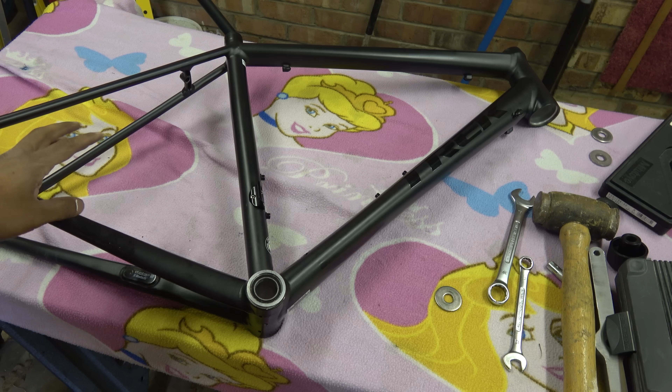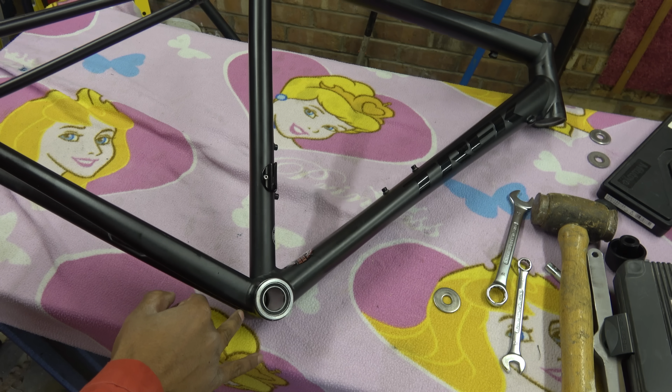This is the Trek Emonda frame. It is aluminium and it's been welded, so it's basically tubes that are extruded and then welded. This bottom bracket, which we'll come to in a second, is BB86. The frame is extremely lightweight for an aluminium bike. The quality of the welds, I'm not too sure about because they've been painted over. And I haven't bothered scanning this because it's aluminium, so what can you do about it? Not a lot.

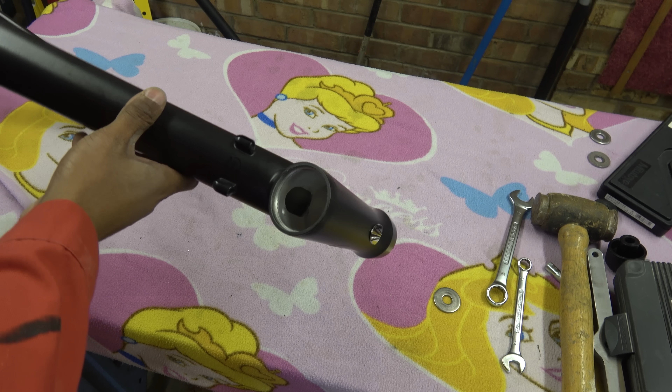Overall frame, it visually looks very good, but there are some issues with aluminium, and the biggest problem with aluminium is when you join it. So this tube, this tube, this tube and this tube have all been welded. As you apply weld to the frame, it distorts. Now, one of the big problems with aluminium is the distortion and then machining afterwards.

Now it looks to me like this head tube has been machined afterwards. The reason for that is this wall thickness where the weld is way too thin to have pre-machined and then welded it afterwards. Now a lot of unscrupulous, basically wankers in the bicycle industry, even the carbon ones, take standard tube, machine it first, weld it, and then give you it. In the case of an aluminium or a steel bike, those bottom brackets are always on the piss, the headsets are on the piss, and all these other things. Now they do have jigs which they say will alleviate this distortion, but it's complete fucking bullshit. It won't stand up in any court of law.

In the case of carbon fibre, you do get these bespoke carbon fibre manufacturers, they again use tubes and then they almost wrap the corners like a bandage with this stuff called prepreg, sorry, and then get it baked, and you get the same kind of thing happening. You get the distortion. Now one of these twats who does this is Filament Bicycles. He's called Richard Craddock, so don't buy a bike from him.

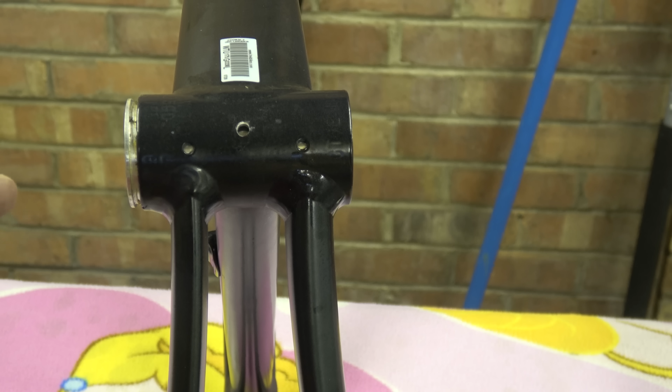Anyway, this bottom bracket is well and truly stuck, so the first thing we need to do is get this out. It may have friction welded itself in, but before we go any further, let me just show you the alignment, because when I picked this frame up, I took one look at it and thought, this is completely ridiculous. So I'm just going to visually show you the misalignment. This is the drive side, and I've made a little concentric device.

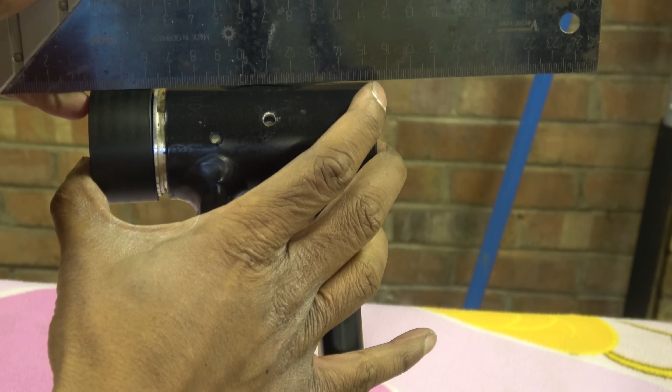Now, if I put that into the drive side, I'm hoping you can see that on the top there, it's flush. Pretty much. But on the bottom, it sticks out by a couple of mil. Let's just see if we can show you that. Might just get a ruler. Alright, so we've gone for a set square, but that'll do. Okay, it is clear there. If we turn this around, up here, it's clear. It's way past it, absolutely way past it, and I can show you the same thing on the other side.

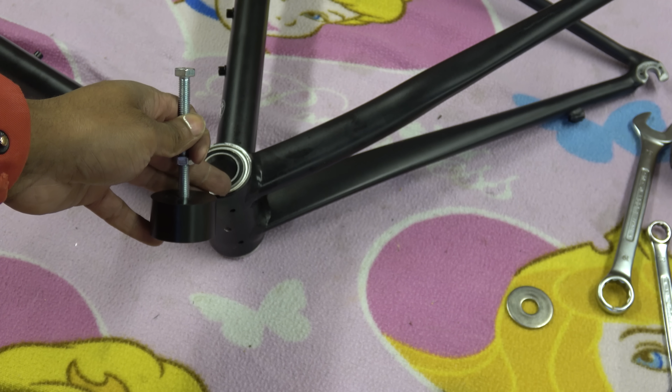This is much more obvious because there's a gap there, but there's no gap there. If I put the straight edge on it, you can clearly see what the problem is, so it's misaligned. I don't know if this has been drilled from this side and then flipped over and drilled from the other, but when we remove this we'll probably be able to find out. So to make it easier to remove this, I'm going to extract the bearing using my homemade bearing extraction device.

I can get it in. Oh, there we go. I need to shift it. Ooh, that is tight. Blimey.

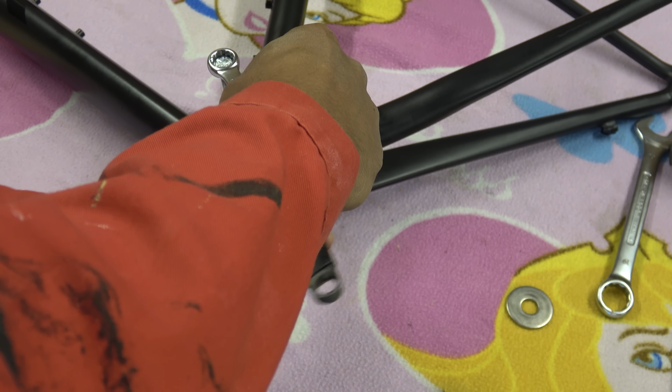Okay, so that's one bearing out. God, that was tight. Jeez. Oh yeah, look what it's done to the bearing puller. It's completely bent it. Oh well. Never mind. Right, flip it over and let's do the other side.

With that bearing, I don't know if you can hear it rumbling, but crikey, it feels horrible. So that's a FAG bearing. That actually spins quite well now I've removed it from the frame, but it will have brinelled from removing. Right, so let's get this one out. Don't know how many more times this puller is going to go. It's not really designed to pull something that's that tight out.

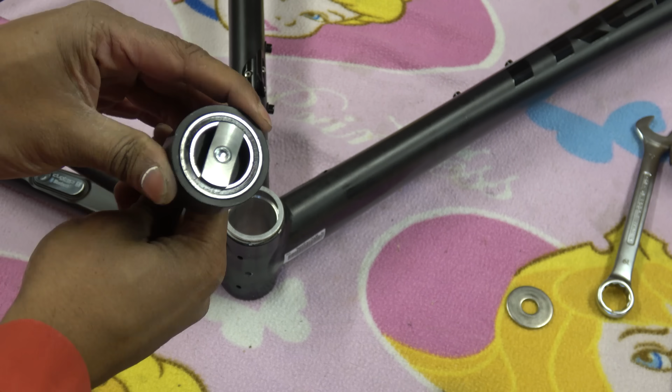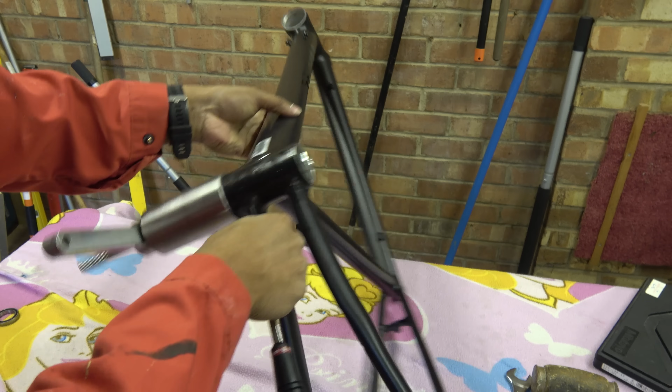Bearing number 2 removed. Now I need to take the sleeve out. So we're ready to pull this out. All I can say is whoever drilled this needs to be shot. I'm just going to get this socket set up. They were clearly a complete fucking imbecile. Oh, right, so I've got the press set up, so hopefully this will come out. Oh god, that's tight.

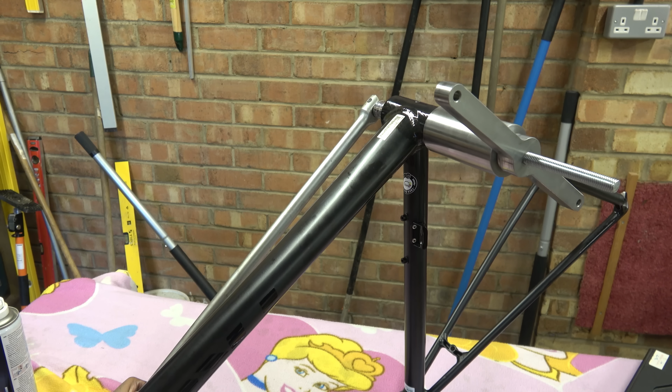Oh god. I think we need a spot of freeze spray now, because that ain't going nowhere. So this is now getting to ridiculously pissing levels. I've had to use my 2-foot 600mm breaker bar to get this to turn. It is so tight. Fucking hell.

I don't know. I think this is gonna have trashed the bottom bracket shell. We'll see. Ooh. Oh my words. God. Jesus Christ. Fuck. I'm going to stop here, get this out, and then show you what we've got afterwards, because it's just taking forever.

So you're rejoining me after about half an hour of fucking around. Managed to get the bottom bracket out. You can quite clearly see something going on the non-drive side, but basically perfect on the drive side. Now, this is my bottom bracket, and I can pretty much certify that when it went out the door, it was to the correct dimension. But if we look at the frame, it tells a different story.

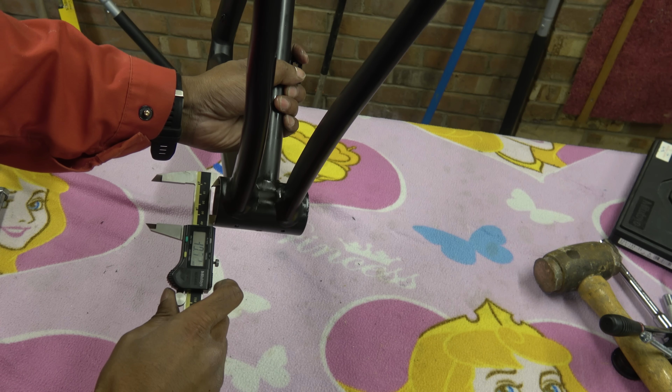Now, there are all those do-gooders that say I shouldn't use a vernier, but just for an initial measurement, if I show you the drive side, 40.99, so that is pretty much in spec. Now there's going to be a bit of inaccuracy with the vernier, but you know, that ties in with that, because the fits have been perfect. There's not a mark on it.

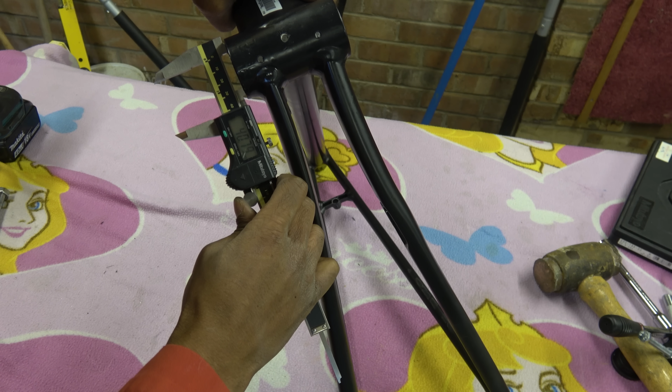Okay, if we turn it over to the other side, which is the non-drive side, 40.77, 40.78. Highest I got there was 40.9. Let's try a bit more. 40.61. Wiggle, wiggle. This is just complete fucking shit. Absolute shit. This needs to go back to Trek for them to have a look at, because this is a machined hole. So whoever's machined this side hasn't done their job properly.

Now if you look inside the bottom bracket, so this is the drive side, there's nothing really there. If you look on the non-drive side, it's completely fucked to pieces.

Right, well, we start the section of the show with PowerPoint. It's my favourite bit because then I go a bit off the wall. Now, I usually pick a topical title for all of this, and I was scraping the barrel because I couldn't really decide what adjective in terms of shiteness was worthy of this frame. And I feel as though I've underdone myself.

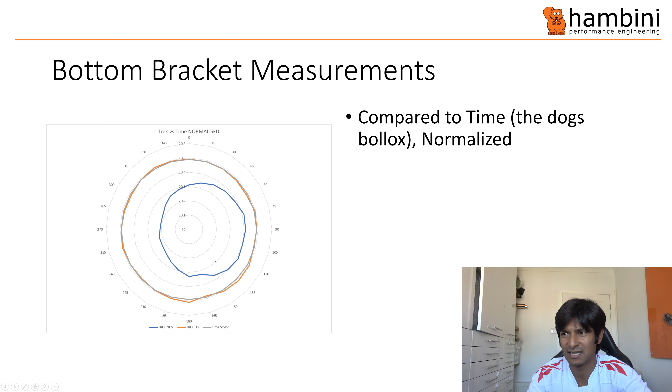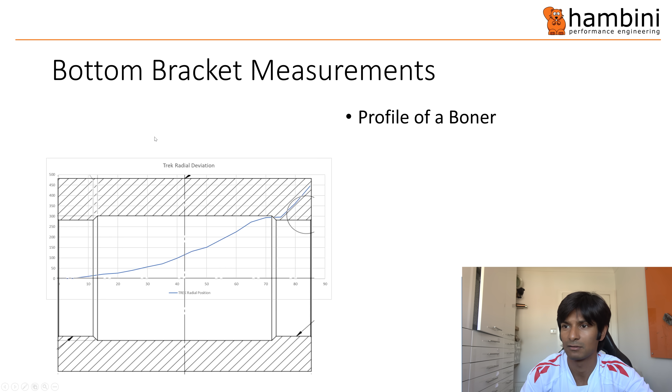Right, this next slide is appalling. So what we have is, I have put in here the grey line, which, oh, I need to turn the pen on, fuck. Right, the grey line, oh, fucking hell. Oh, bollocks, what have I done? Fuck. Why is my pen not working? Oh, right, here we go.

The grey line, which is in there, is the Time Scylon. So that is the current dog's bollocks of bottom brackets. This is all normalised to BB86. Now, if you look at the Trek drive side, which is this orange line, you can just about make it there, it's not actually that bad. So we can get away with it. What is appalling is the other side. Fuck.

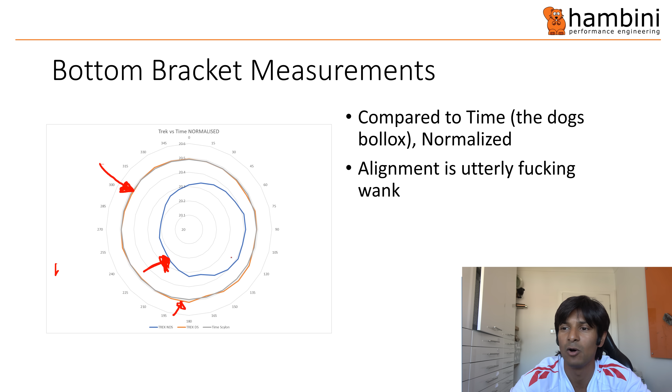So the blue line is the non-drive side, and I might have even labelled these the wrong way around, but it's kind of immaterial. The one is a lot smaller, and then the centre is there or thereabouts, and the centre of the other side is here. So you've got that much misalignment, which is utterly fucking wank. Fuck, more coronavirus. Right, I need a drink.

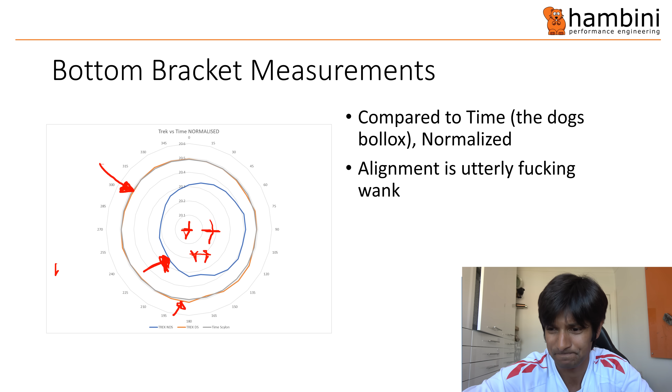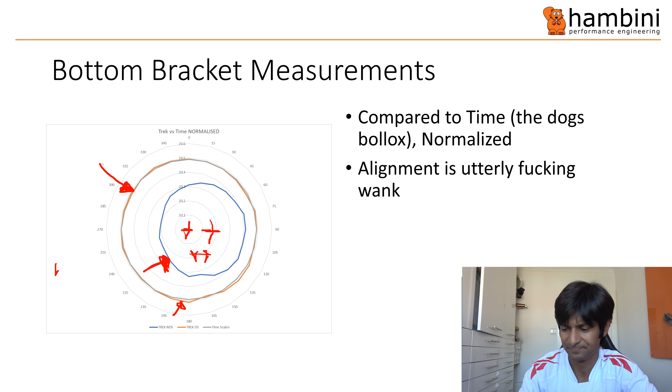So, a couple of people asked me what normalising means. Normally the Time Scylon is BB386, so the hole's 46mm. On BB86 it's 41. So all I've done is scale it, basically. Right. So the misalignment is utterly shit. This is the radial deviation.

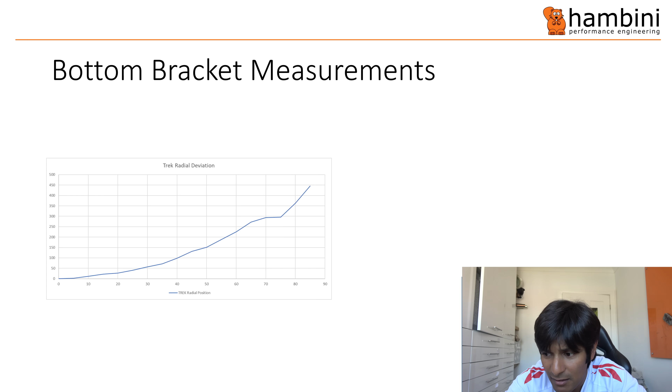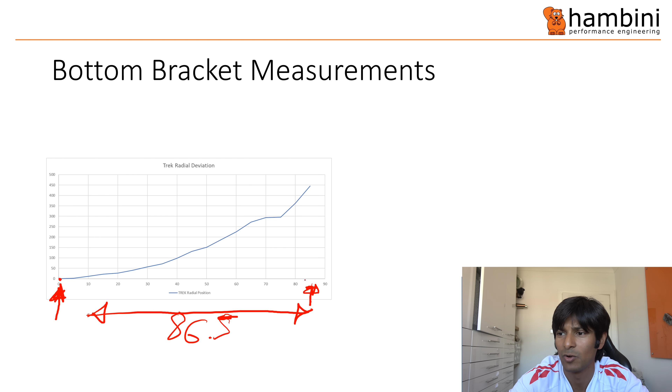So if you pick, where's the fucking pen gone? Right. If you pick here and start at the bottom bracket, and then you finish here, that is a distance of 86.5mm. What that's saying is, ideally you want the centre line to be at 0 all the way across. If you measure the relative centre line between the start and the end, you are out by, on average, 450 microns, which is 0.45mm.

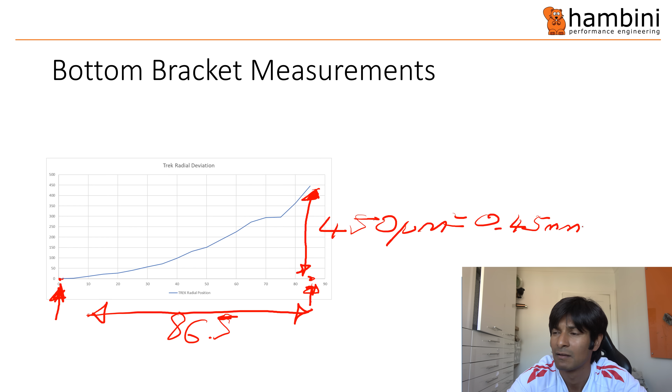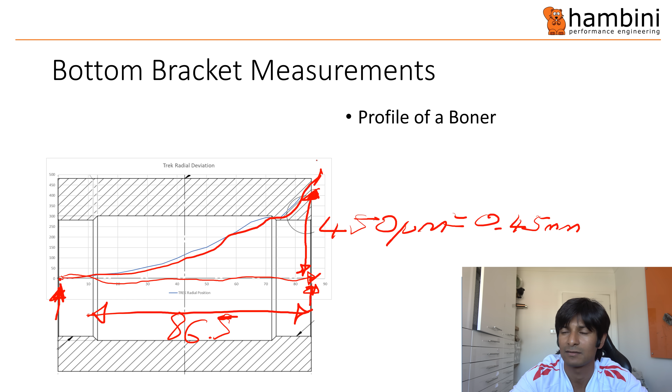What I've done is I've overlaid, well, before that, it's got the profile of a boner. I couldn't find a suitable picture that I could show on my YouTube channel of a boner. I'll leave you with that one. But I've overlaid a BB86 frame shell on it, so you can see what the deviation is doing. You ideally want that line to be straight across there. What's actually happening is it's bent like a boner. So that's what's happened.

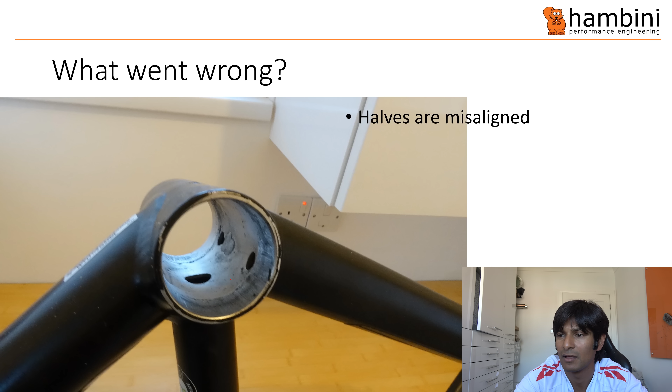So what went wrong? Well, the halves are misaligned. It is difficult to see in that picture, but where you've got all these striations and fucked-upness, that is what is known as galling. Aluminium galls. So if you try and put two surfaces together with too much friction, it effectively friction welds itself, picks up, and then you get this problem. And that's why it was such a fucker to get the thing apart.

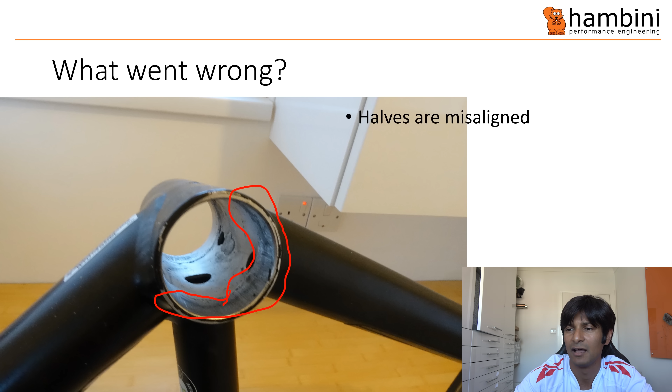So the halves are misaligned, and you can see this defect over here, which I've got in better detail in this shot. So over here, there's this defect. So what's happened is the guy or girl, can I erase that? Pointer options, ink colour, eraser.

Now, if you look at the other side, which is here, there's no defects on the hole. There's nothing there. On this one, what's happened is he's blown a hole through here. As soon as you blow the hole through, you need to refill the material, and that's what all this is here. And after he's refilled it, he's ground it, and that's why it's all flattened. You can see the grinding marks on there.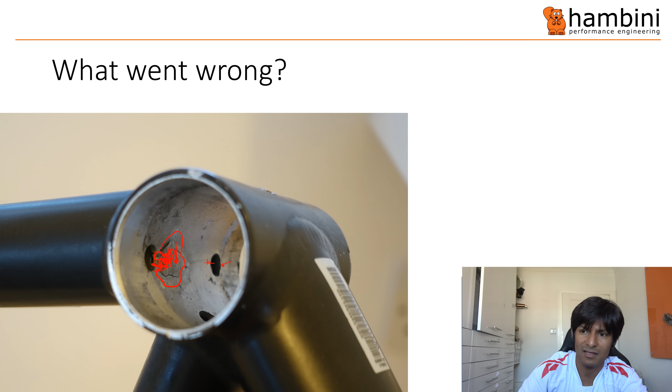So that's the problem. Now you might think, okay, so he's blown a hole and filled it with metal. What's the issue with that? Well, the problem is around welding. Welding causes what's known as a heat affected zone. So when you heat something and then weld it, you get this. You're effectively joining two bits of metal, one bit of metal here and the other bit of metal here.

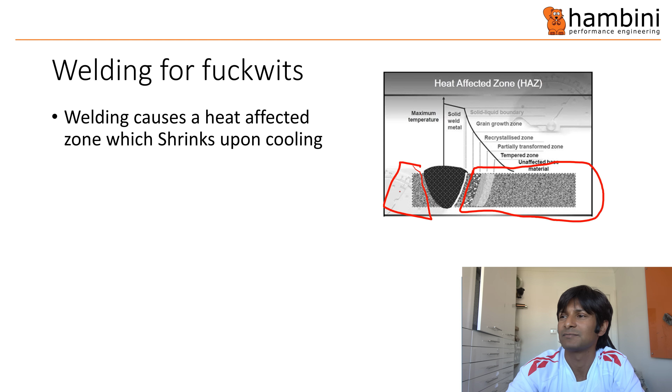Because of the heat involved, you end up with this piece here, which is the weld material, and then all the way going that way, you end up with a change in the material structure. So its properties change, so it becomes less strong, brittle, all this kind of stuff changes as you carry on. The biggest problem is, as it cools, it shrinks. That is going to be covered on the next slide, but that's what happens. It shrinks. As it shrinks, it distorts.

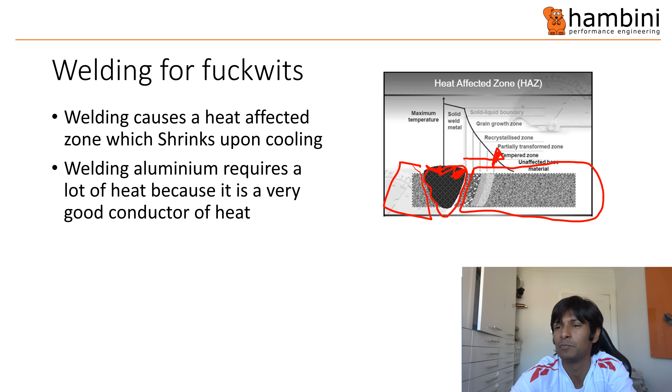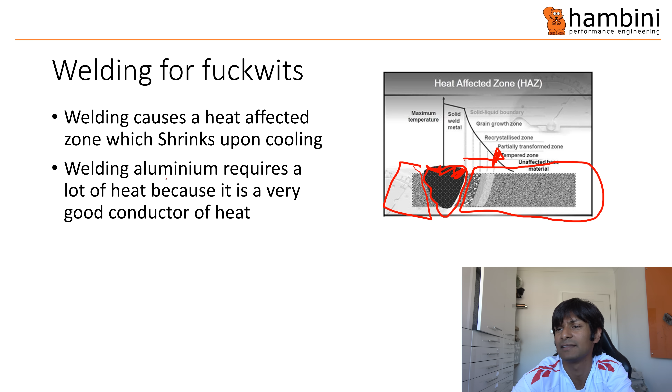Now, welding aluminium is a complete bastard. It is a bastard because it's a very good conductor of heat, and if you're welding thin aluminium, it's very easy to blow a hole in it. You could literally puncture a hole in it just by pulling the trigger once and away you've gone. So it is quite difficult. Most people TIG weld aluminium. You can MIG weld it, but TIG welding is the go-to standard really.

The other thing is, when you get to thin wall sections, you can distort the material after you have machined it. So you get the tube, machine it away, it passes quality control, and you'll find after 2 days the shape is not what you intended. And that's because thin walled aluminium relaxes.

So if you got a Hambini bottom bracket, the material is almost irrelevant. Even in steel, titanium, whatever, when it gets to thin wall, and it's the thin wall, not the material, that's the problem, I always let it relax. Let it relax for a day, 2 days, and then you'll find that the dimensions change, and then it probably needs a tickle. Once you've done the final tickle, then away it goes.

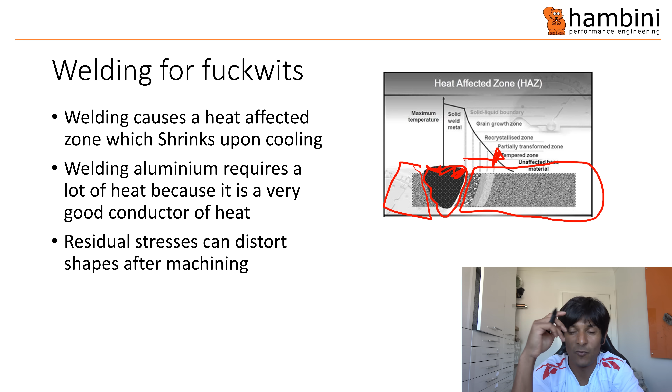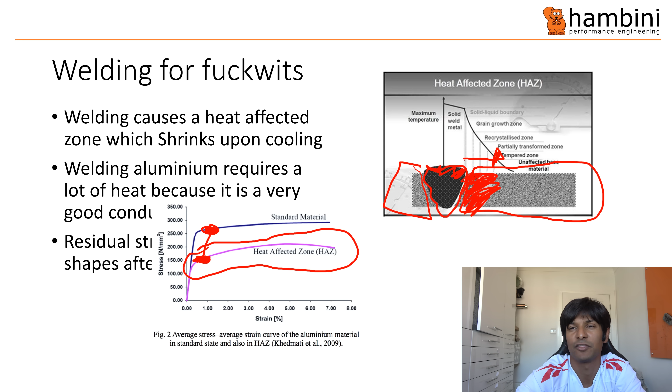The other problem is the strength. So welded joints, specifically around here, in the heat affected zone it's called, those joints are significantly weaker. So the ultimate strength is down from there to there. If it's stress in newtons per millimeter squared, that's the same as megapascals, you're 260 down to 160. So you've lost over a third of your strength, and the joint is brittle. So that's the issue there.

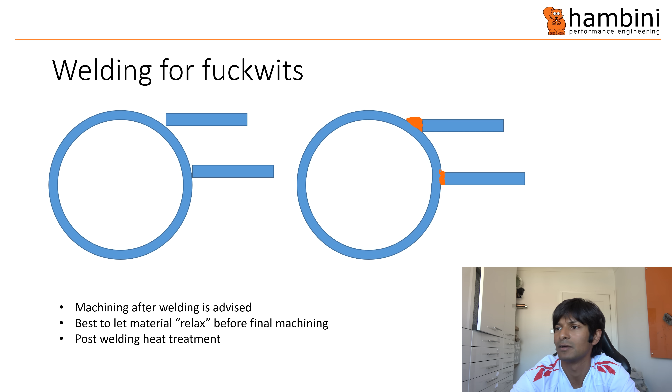Right, this is kind of an illustration of it. So this is your round tube, let's call it the bottom bracket, and let's say that is part of the chainstay and that is the other part of the chainstay, and you need to join these three parts together. What you'll end up with is this. You can see this orange bit is the weld material, but if you look carefully in this area, it has distorted the tube, so the tube is no longer round. This can happen to carbon as well.

One bottom bracket I got involved with was a chap from Switzerland. He bought a bike from a guy called Richard Craddock, who runs a company called Filament Bikes somewhere in the West Midlands. Richard Craddock was measuring the tubes before he put the bike together, bandaged the pre-preg carbon around it, baked it, and then was sending them out. Now I got one of these, and my bottom bracket went absolutely straight through the frame. And he wasn't really that interested. To be honest, I don't think he had a clue. So I think he's in line for a roasting shortly.

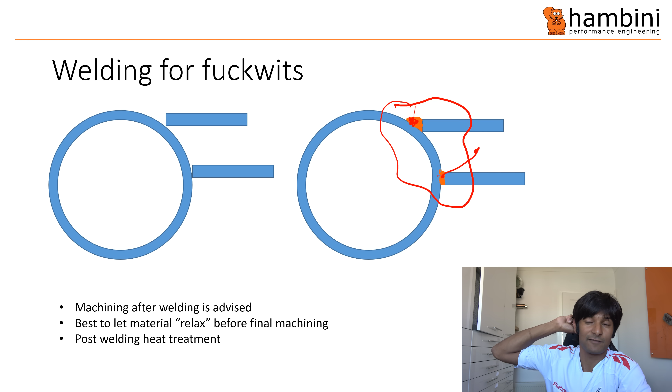The thing to do with this is, first of all, you need to machine it after you've welded it. You might think, well, that's pretty obvious. Well, you'd be surprised the number of bike builders that don't do that, because it's actually very difficult to hold the bike afterwards to machine it, because you can't do it in a lathe. You'd have to do it in a boring machine or a milling machine.

Again, you need to let the material relax before you do the final machining, because you get residual stress, and then you could use post-welding heat treatment. Now on aluminium, it's a bit of a grey area, because as you do the post-welding heat treatment, the material properties change, so you could make it weaker.

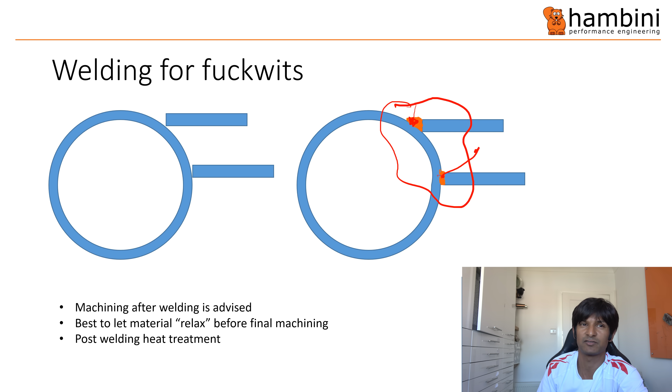So that's why T4, T6 and all that kind of stuff exists. So it's the heat treatment that's involved. Now the fixes for this are not straightforward. The first few fixes I could think of were, well, to slash my wrists, pour citric acid onto someone's face, fire some semi-automatic weapons at someone's head, Prozac, cocaine. What I'm really trying to say is this is not something that is easily fixable.

So I sent the frame back and said you should go back to Trek and take it up with them. I don't know what happened after that, but this is pretty appalling. It's just shit, really. Absolute shit. Completely indefensible. You just cannot defend this, because it's just dreadful. Right. Now we come on to the cuntish shitbag scale of engineering fuckwittism,

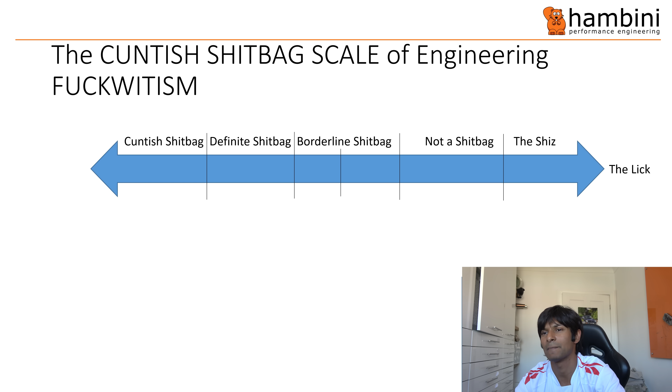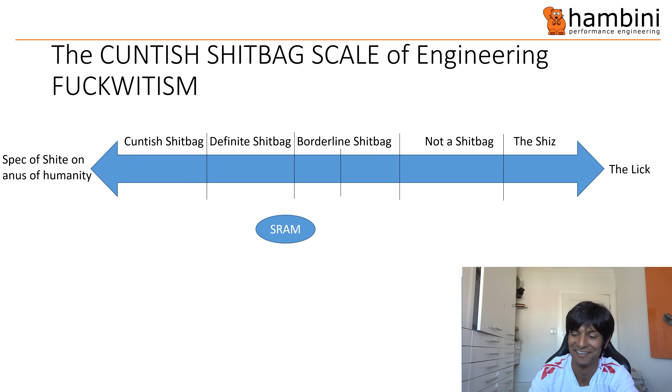with the usual suspects. Right, the lick, the Shiz, not a shitbag, borderline shitbag, definite shitbag, cuntish shitbag, and speck of shite on the anus of humanity. We have SRAM in definite shitbag, borderline shitbag area. Just tolerances. Tolerances. Bollock heads who believe wider tyres are faster. They're the same as last week. I haven't changed that one. Spokeless CFD.

A number of people. Sorry, my coronavirus is really bad. I blame those individuals who go riding in the middle of a lockdown filming themselves for spreading it. Right, and then reporting to the police.

So Spokeless CFD, a bunch of idiots. And the other thing I've read was some fuckstain said our disc wheel is 12 watts faster than Joe Bloggs' disc wheel. What a load of fucking shit. The drag difference comes from a solid boundary. The aerodynamics of a disc wheel is like trying to describe the aerodynamics of a penis. Now I believe, well, yeah, I can't say that bit. Right, anyone who is not French, so vive la France, allez les bleus.

Shimano, right, they are heading towards the left, because they still haven't sorted my rear mech out. Now, a guy from Merlin Cycles called Rick did contact me, and I replied to him saying, you know, where's me rear mech? And I haven't had a reply back, so I'm hoping he's chased it up with Shimano or Madison or whoever it is.

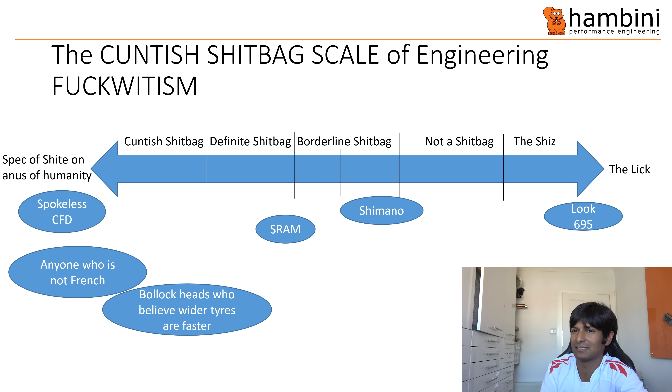Right, the Look 695. Oh, I fucking want one of them. Might have ordered one. Have I spelled that right? If you're in New Zealand, please tell me if I've spelled that right or not, because I'm not quite sure. I've probably spelled it wrong, but I am dyslexic, and I'm 5. So there we go. Right.

Fruitcake middle-class time trialists who think they are fast. I found that these middle-class fruitcake time trialists like to have discussions about me and my language and not the engineering. I mean, this is just pure entertainment, fuckstains. Right. Anyone who thinks H7 is a size.

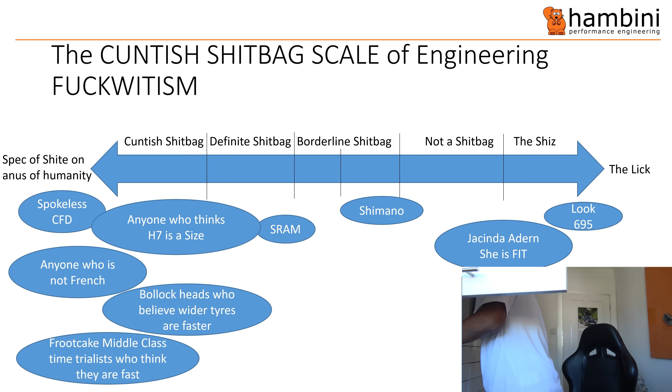Now, I have a book. Allow me to get my book. Where's my fucking Zeus book? Ah yes, I gave my Zeus book to Jimmy from nursery. I was trying to get into his mum's knickers and I failed. But yes, Jimmy from nursery has my Zeus book.

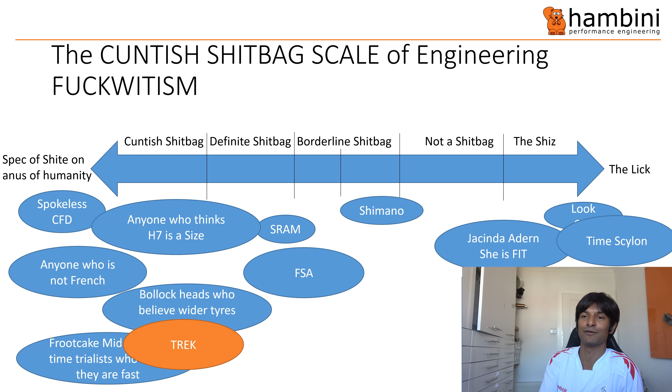FSA! Time Scylon. Oh, that is a good buy. And Trek. Now, Trek are in cuntish shitbag, definite shitbag territory. Now, there's all these people who'll say, oh, you've got a sample size of 1. Well, you should have a sample size of 0. Nothing like this should get through the door because it's utterly fucking wank.

Right, that brings us to the end of this presentation, and that actually brings us to the end of this video. Normally, you see me fix these things, but you have to draw a line somewhere and know when to walk away. And that is with this Trek frame. So they have the enviable position of a frame that Hambini couldn't fix. So yeah, if you're out there going to buy a Trek Emonda, then just watch this and, you know, think about it.